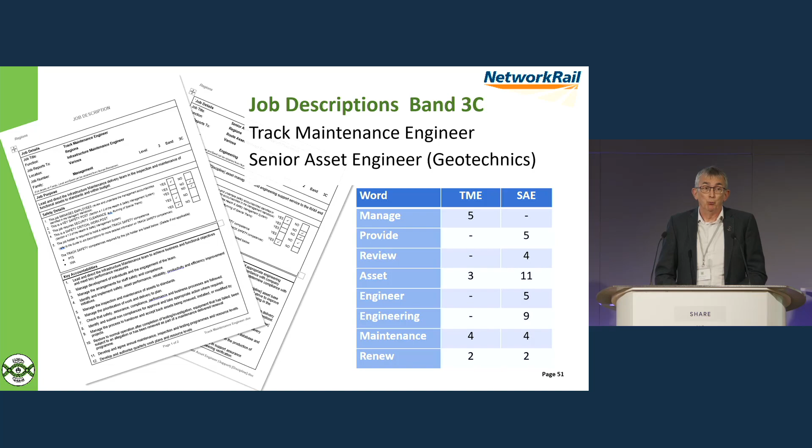However, it does appear in the senior asset engineer's description, where engineer or engineering appears 14 times. It makes me wonder, are you getting the enjoyment from your job that you want to as engineers? And how do we up that level of engagement and involvement, if you chose an engineering discipline because you enjoy engineering? Are you doing enough of that? Maybe that's something for Dave and the team and John to consider as well.

But that's kind of a segue really into the next part. What I wanted to think about, building on this issue of comparisons between the asset groups, is why is it that you've ended up in this position?

Dave, I've worked with you for many years on North Western Central. It's missing from my very poor bio, which was read out at the beginning - I was track earthworks and drainage RAM, earthworks and drainage RAM, territory earthworks and drainage RAM, and I was also territory drainage and lineside engineer for 8 years before I came to the technical authority.

Dave came to me one day and he threw the printouts of the drainage standards down on my desk and said, 'Julian, these are rubbish. There's no definite statements in here about what you must do. There's no things you can actually measure your success delivery against. How do you exist in this? I'd rewrite the whole lot if I had my way.' And I remembered that, Dave.

I think that's a highlight of the difference between civil engineering standards and track standards. We've come from one end of the discipline where we've had this massive base of assets which we haven't ever fully understood. On the other hand, you've refined the requirements for track over decades, centuries actually, down to a very, very strict and clear set of rules and guidelines you have to work to.

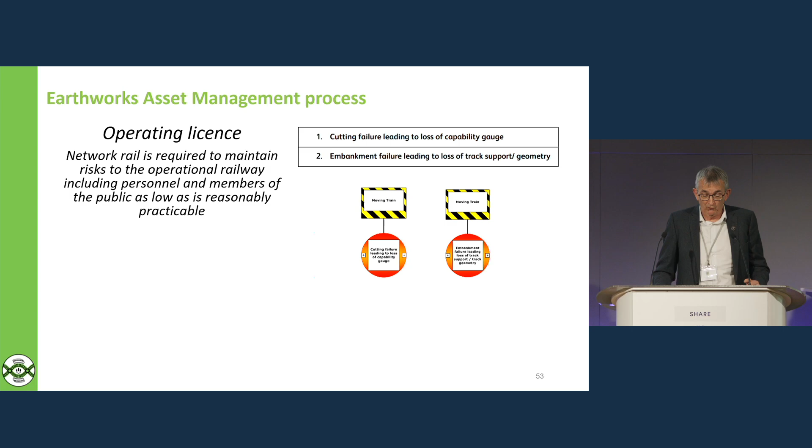Anyway, we are more enlightened now. I'll just run into the earthworks asset management process. The operating licence requires Network Rail to maintain risks to the operational railway, including personnel and members of the public, as low as is reasonably practicable. We have two primary risks we are looking at: cutting failure leading to loss of capability gauge - basically stuff on the track that's fallen off the earthworks - and embankment failure leading to loss of track support and geometry, basically earthwork movement removing support from the formation.

Those two risks, and we have a process - you may not think we do, but we do - for trying to work out where the worst risks are. Similar to the structures process, we have our examination, which identifies change of the assets. Those are done between annually and 10-yearly, depending on the hazard presented by the earthwork. Those changes in every examination are evaluated by an engineer to determine whether the changes have been significant between examinations. Further work may be commissioned on the basis of what we found, which will be an assessment - actual numerical analysis, stability analysis of the earthworks to work out how unstable they are.

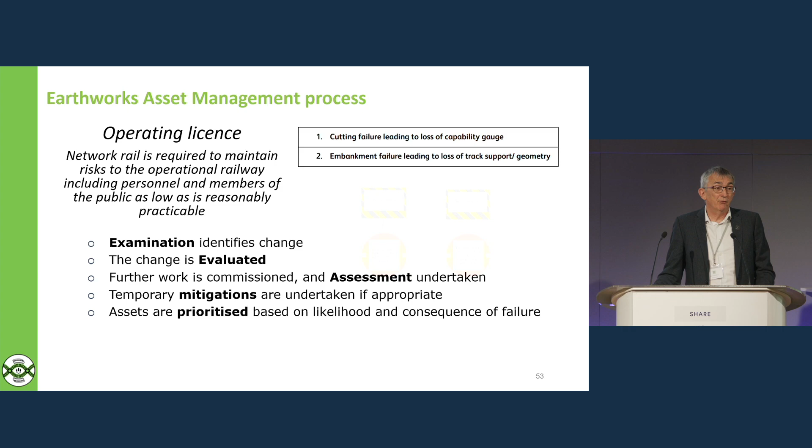And then we will put in place some form of mitigation, if appropriate. That might be monitoring, or it might actually be prioritized for work on an urgent or emergency basis. Those interventions - maintenance, refurbishment, renewal - may be put into the programme and delivered. We're normally planning between sort of 5, 7, 8, 9 years ahead, the more enlightened regions. But if we know one thing, the best laid plans change on a rapid basis.

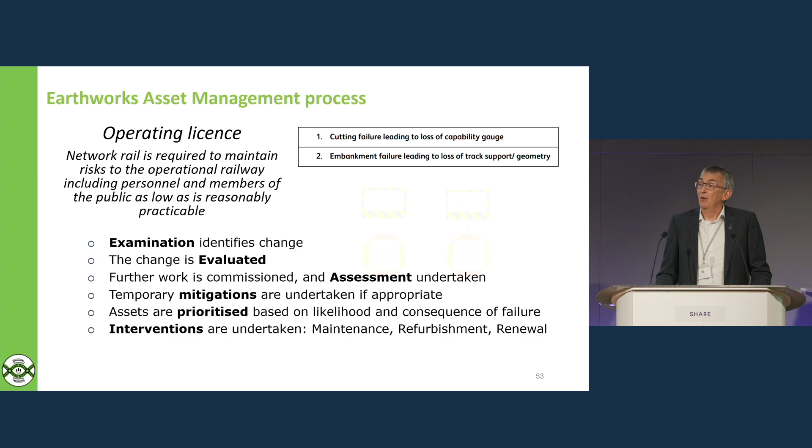We've got 191,000 assets. We divide the earthworks - embankments, soil cuttings, rock cuttings - into 100-metre lengths, 5-chain lengths effectively. Each side of the railway is an earthwork asset. And we have 191,000 of them.

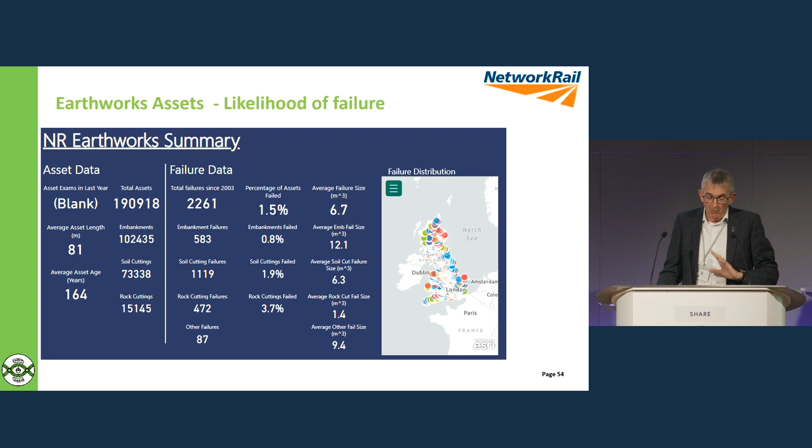Going back to my earlier point about where the priorities should be, we've got the most embankments. I was right, you see - I should have been doing most of my work on embankments after all. 54% embankments - we're bound to want to do more work on those because there are more of them. 38% soil cuttings, 8% rock cuttings.

What we find is that 49% of our failures are actually in soil cuttings. That's the overall failure numbers, which means that maybe I ought to be paying a bit more attention to soil cuttings after all.

The embankments are a very close run second or third with the rock cuttings. But when we consider that rock cuttings represent 8% of the asset group, we find that 3.7% of all rock cuttings have failed, and that's far and away more than the proportion of soil cuttings or embankments, which lag behind.

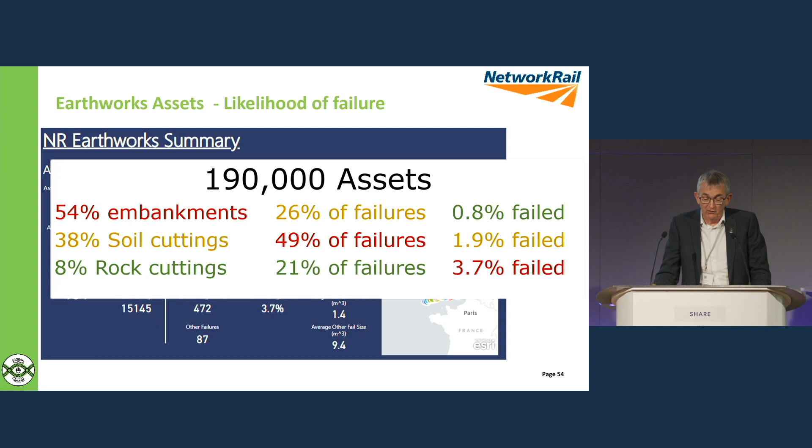I think where I want to go with this is to say we need your help in identifying those locations which are the real priority for intervention on embankments. We need to do that in other areas as well, but especially on embankments. I'll flick through these next slides because I think I'm perhaps pushing the time a bit.

John mentioned PF plot. Wouldn't it be great if we knew when our assets were going to fail? Wouldn't it be lovely? You arguably stand a better chance with metal and components of working out where it is, but it's still a black art.

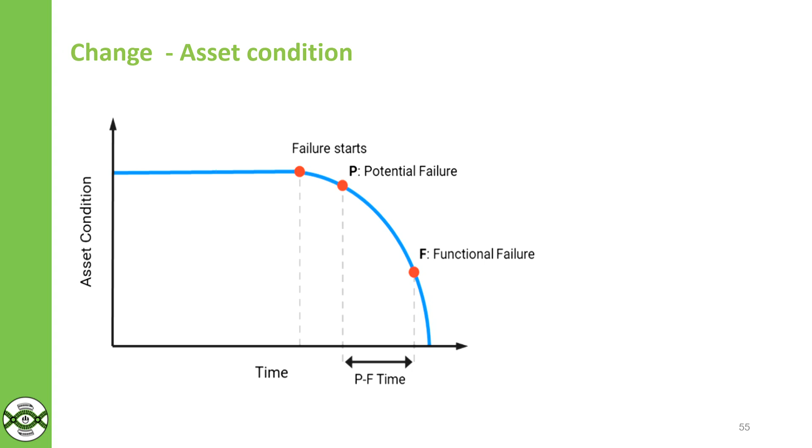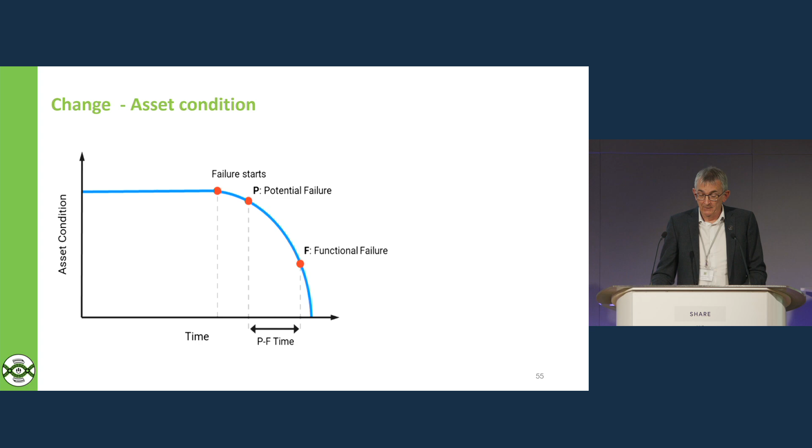For earthworks, we designed to 120-year design life, but some of our earthwork assets now are approaching 200 years old. That is a real challenge because we find it really hard to predict when and where they will fail. There are huge benefits in understanding this, because the cost of intervention, if you catch it before it fails, is so much lower than if you wait until it has actually failed.

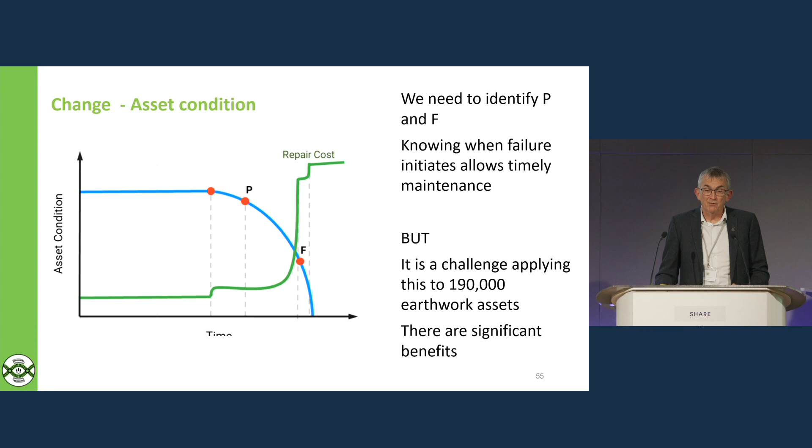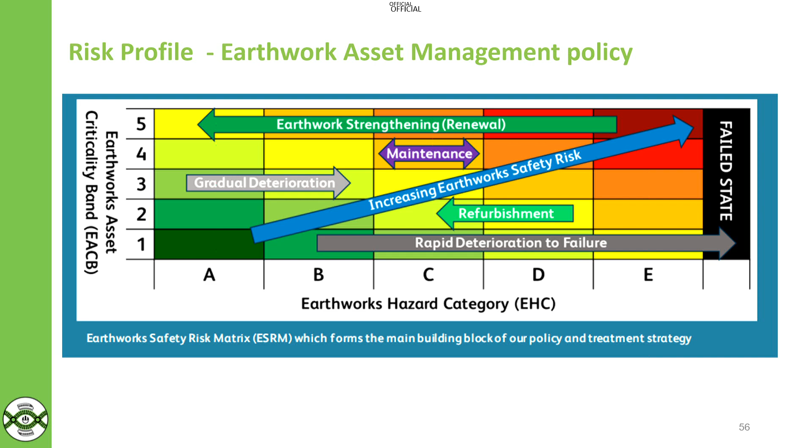So that's the panacea, I think, for all of us in asset management. And we enshrine this in our 5x5 matrix, in which we look at the hazard category, along the bottom, which is the likelihood of that asset failing. And we look at the criticality on the left-hand side, which includes things like line speed, complexity, whether it's electrified, whether you're on the approach to a tunnel portal, whether if a train fell off it would pile into a school at the toe of the embankment, that kind of thing. That gives us our consequence score on the left-hand side.

What we do is we plan our interventions to try to distribute them into those highest risk locations, whilst trying to maintain the asset condition as best we can.

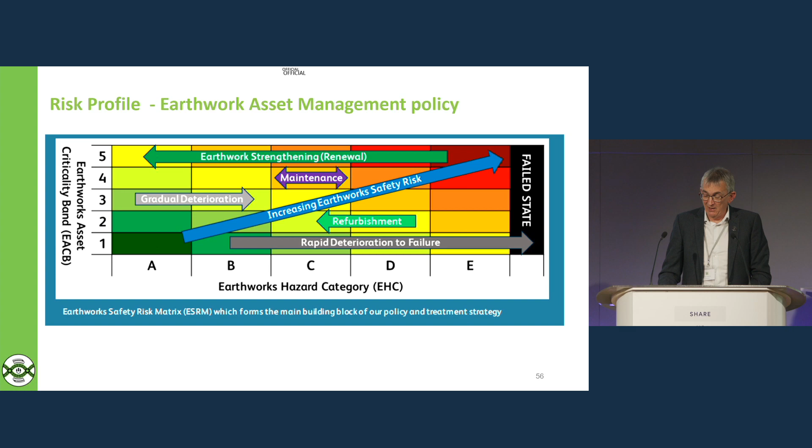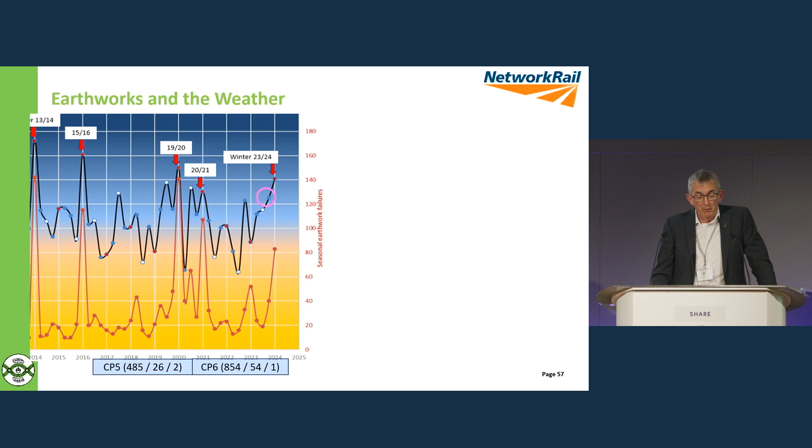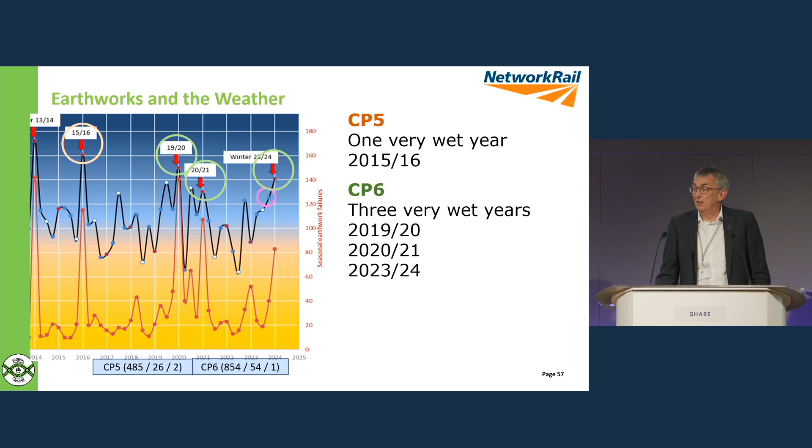But of course we have the weather coming in. CP6 has already been said to be one of the wettest years on record. Unlike previous years where we might have had one outlier event, for example CP5 in 2015 and 16, in the past 5 years we've had 3 very wet years indeed. This has a really bad impact on earthworks, which rely substantially on the lack of water, or the management of water, to maintain their integrity.

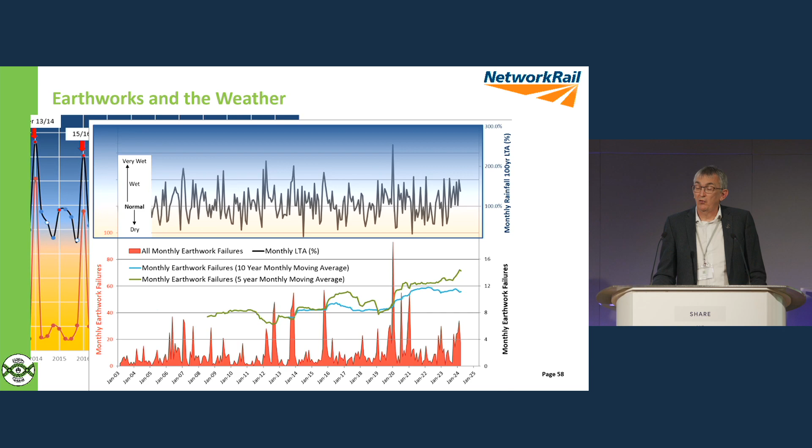This is a bit of a busy graph, but in effect the detail here is that the long-term trend of rainfall and earthworks failures in CP6 is increasing. Those 2 dashed lines show - the top one shows the increase in rainfall, and the lower one shows the increase in earthwork failures. Now, this may be a blip. I'm perfectly prepared to accept that.

I believe that climate change is real and we're seeing the evidence for it. But it may just be a blip. It's been a really grim blip to live through, to be perfectly honest, and I'm sure you will all have experienced some of the pain. We don't know what's going to happen into CP7.

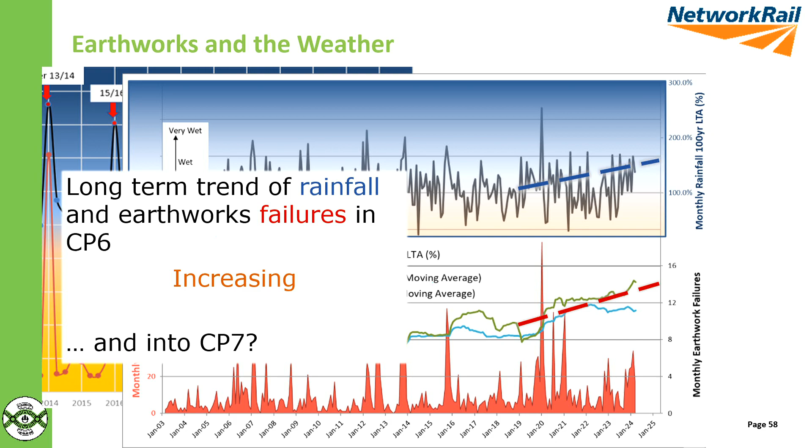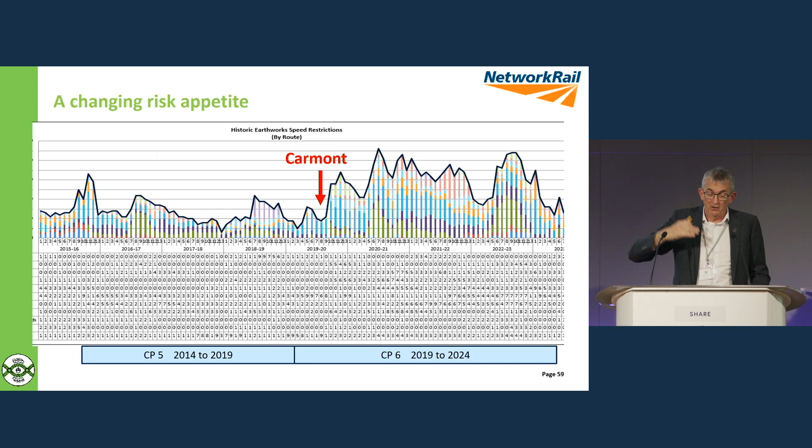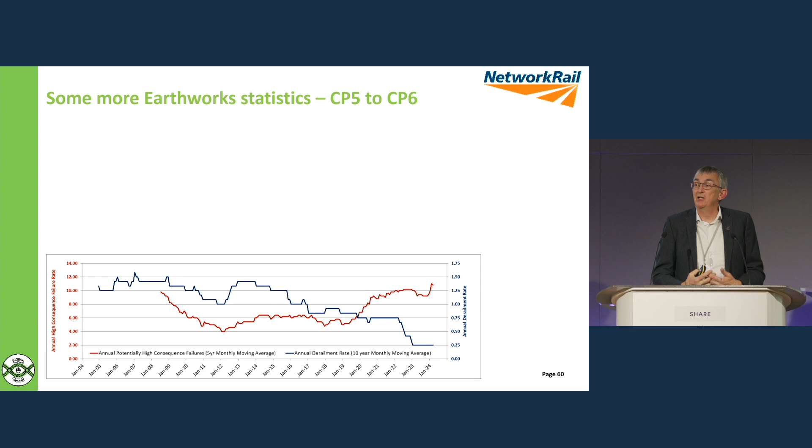If we put Carmont in, we see a pretty much continuing trend on the left-hand side of the graph. In the immediate aftermath of Carmont, speed restrictions imposed to manage earthworks risk shoot up. In fact, in summary of the data, we're seeing 3 times the delay costs associated with earthworks now over the last control period, and that is this reduction in appetite for risk associated with earthworks. We don't want to see failures associated with earthworks.

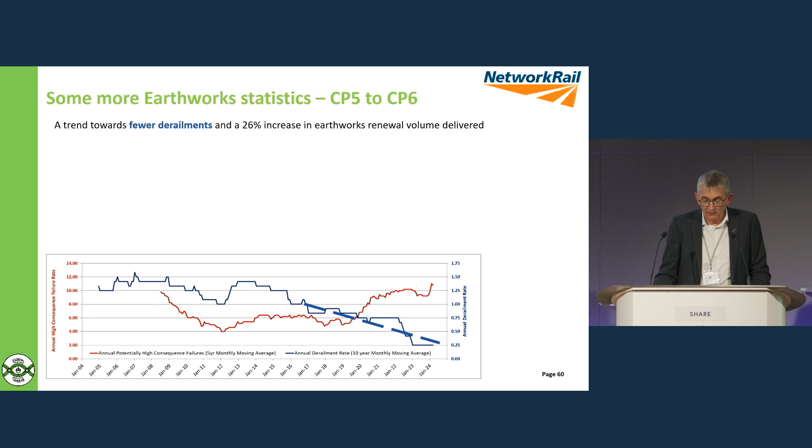High-level statistics - Ronnie's waiting patiently in the wings. We have seen a trend towards fewer derailments, from an all-time high of 13 derailments due to earthworks, which actually led to an improvement notice from the regulator back in 2007. We have also seen a doubling in the worst failures that have occurred, from CP5's 26 failures to CP6's 54 failures, scoring 50 or more on our scale.

We've also seen a 76% increase, again because of the rainfall we've seen over the past 5 years, from 485 in CP5 to 845 in CP6. So a massive increase in the number of failures, and we need to find a way of managing this.

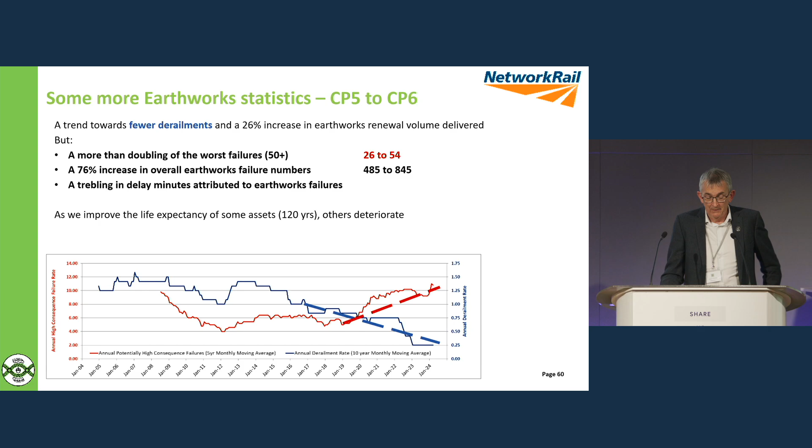As I said, a trebling in the number of delay minutes. At this rate, and our current rate of spend, it would take us 200 years to renew our assets.

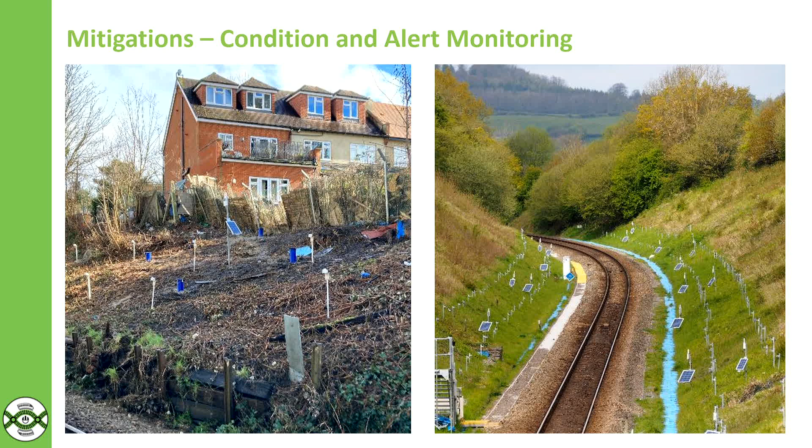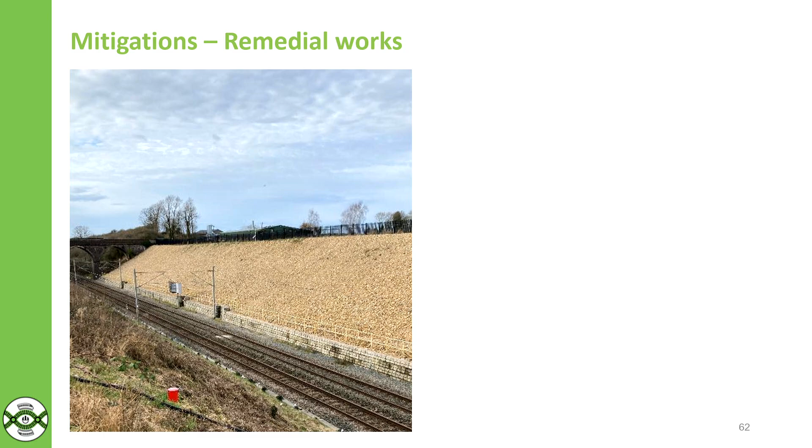Just to finish off this section, mitigations: we put in place geotechnical instrument arrays, inclinometers and slope monitoring equipment. We put in systems which are able to manage the risk of failure and give us an alert and alarm if part of the slope falls down and comes into contact with the train. We undertake remedial works as part of our planned program, fixing earthworks that are destabilized, including a slope regrade and some soil nailing at Crewkerne Tunnel Portal.

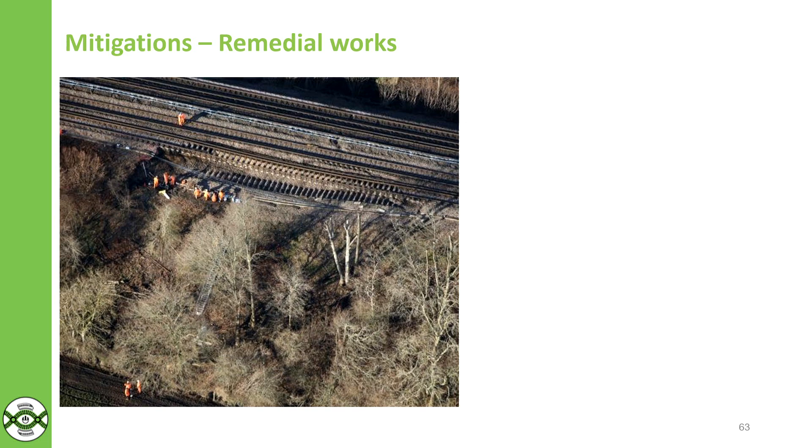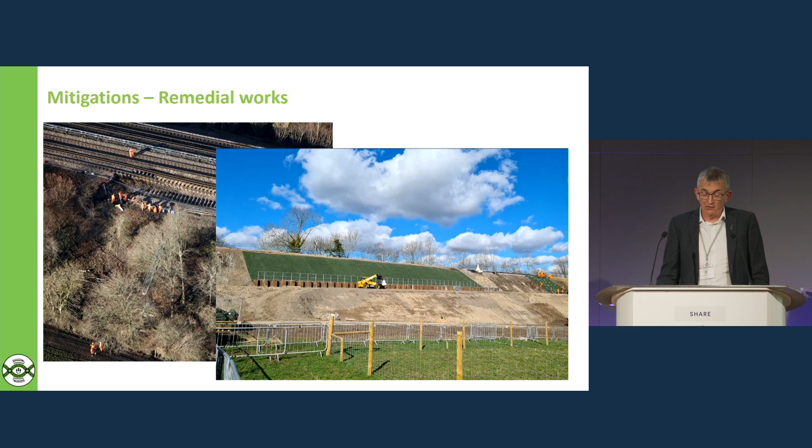And Hook Embankment, at the beginning of last year, had a massive earthworks failure which left the tracks suspended in the air. Could we have predicted that? Well, we're going to come on to that in Ronnie's talk in just a second. That intervention was undertaken by piling the slope.

So Ronnie's going to come and talk to us about this kind of thing, which is a track defect. Why is it there? What's causing it? What's the root cause? What is the issue? Has it just appeared? Does it reappear? Is it seasonal? Has it followed a period of wet weather? Who knows? And to come back to John's point, how do we predict failure before it happens?

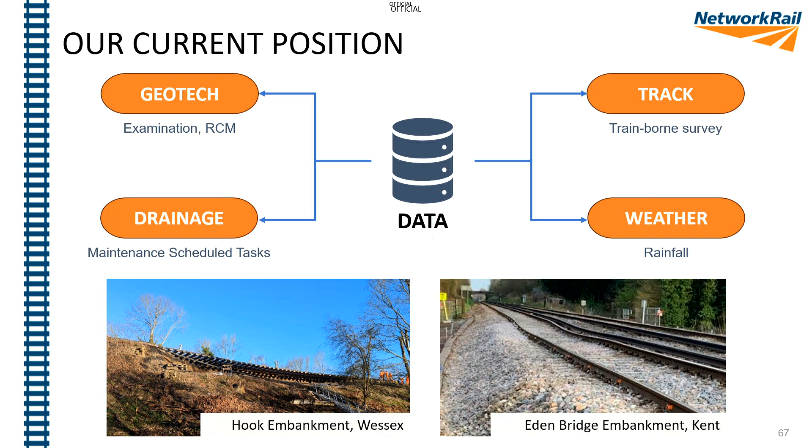At our current position, we have data from the geotech, drainage, and track assets, as you're all aware, ranging from routine data collection and visual examinations to train-borne surveys and maintenance records. Throughout the history of the railway we've tried to make better use of data for better asset management. However, in 2024 we're faced with increasing challenges: an increasing number of failures, working within limited budget, and the increasing vulnerability of our embankment assets failing because of changing weather patterns from climate change.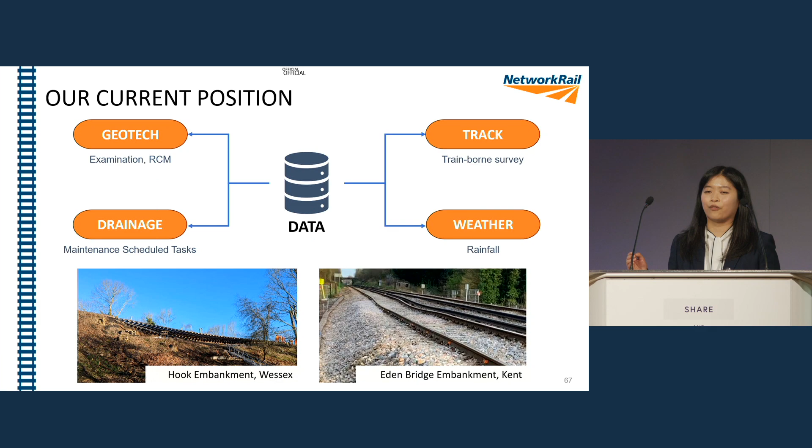So how can we do better? Is data part of the equation? I think the answer is yes, and there's great potential in us collaborating. It's when we have such close collaboration that we can unleash the full potential of the vast amount of data we hold.

Thanks to the continued effort in running track geometry measurement trains, we hold a comprehensive set of data on track geometry. We're analyzing this data to tell us more about the condition of both the track and earthwork assets. One algorithm I'm working on looks at repeat faults. As many of you know, when an embankment is unstable, track faults typically appear on the surface. When these are fixed by our teams, there's a temporary improvement in track geometry, but very often these track faults reappear because of underlying movement within the unstable embankment.

It's by picking up these recurrences of track faults and aligning them with our earthworks condition data that we can highlight high-risk sites for our TMEs and earthworks engineers to focus more attention on. The second algorithm is the embankment track quality indicator, which looks at longer-term deterioration in track geometry in relation to our embankments. These algorithms are useful indicators of where we might see a higher probability of faults or failures in the future, helping us uncover high-risk sites we might not have been aware of.

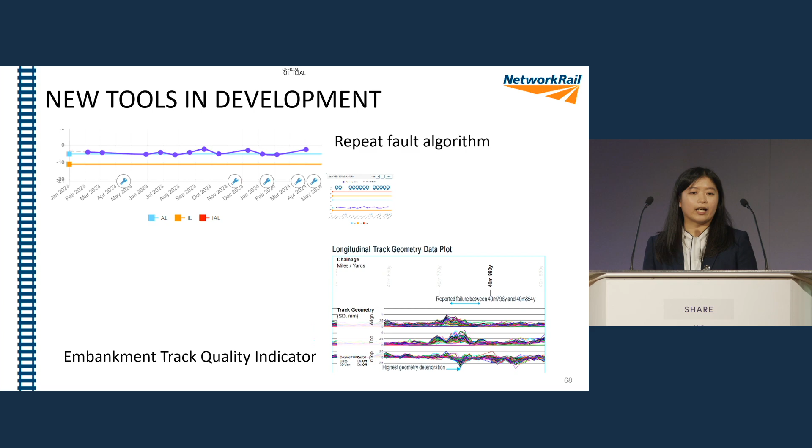When we develop these tools, we have to carry out robust assurance before putting them into business practice. It's exactly at this robust assurance process that track and geotechnics engineers have to collaborate and lead on. We can validate the tool's prediction of failures against actual failure and fault statistics, or against known high-risk sites from our human engineering judgment, and use this to fine-tune the algorithm and improve the probability of detection.

It's also very important to reduce the number of false alarms, as it's simply not feasible for us to go out and verify every single one of them. When we use these tools, it's good if we can constantly review their accuracy and continuously improve them.

It's important to recognize that these tools are tools. They're developed to enhance and facilitate our understanding of the data, but not as a replacement for us as professional engineers. It's important to communicate such limitations with the rest of our communities and avoid over-relying on these tools.

So when we're faced with sites flagged as high risk from any of these algorithms, it's important for us to critically evaluate what the tool tells us and to look at the problem holistically as an engineer, not to simply believe what the tool is telling us all the time.

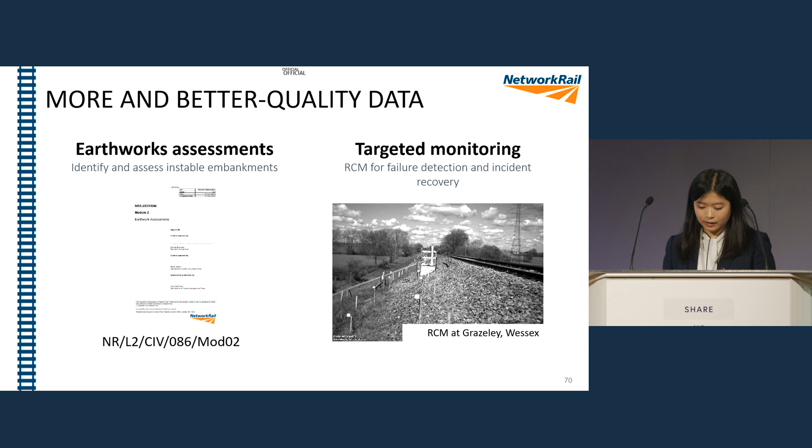These new forms of data and the new decision support tools are good in helping us make informed decisions about our assets. And it is good that these can be made available and visualized on a single centralized platform, as presented by Rob earlier, on Leica Insights.

This will allow TMEs and earthworks engineers to work together in monitoring the track conditions and put control measures in place before the complete failure of our assets.

As you might also already be aware, there's a new clause in our track and geotech evaluation standards that mandates an interdisciplinary asset review regularly.

There's already some very good practice in some areas with close and mature working relationships between the track and earthworks engineers, and it's now formally in our business process that we have to do such regular reviews.

And it's indeed in such interdisciplinary asset reviews that the new decision support tools will be useful if they're embedded in, to provoke thought and to trigger discussions between engineers on where the high-risk sites are and how we can fix them.

So all in all, there's great potential in the geotech and track communities working together in making better use of the data we already hold, developing these tools based on such data with robust assurance, and better targeting sites for the use of our limited budgets in both monitoring and renewing our assets.